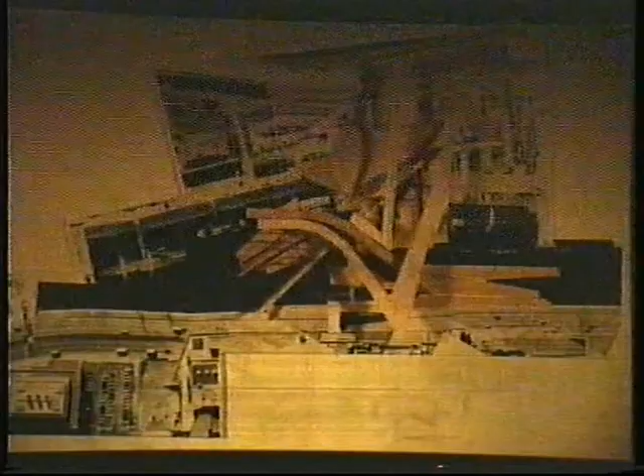Here was one proposal about a piece of parking garage with the land, fixing some of the boat museums, starting some connections with the old mall, changing that into a commercial street, and in a way I offer this as a kind of tool to dialogue with the city and the client. It's a dialogue we started two years ago, and we keep going with letters and things like that. So I hope sometime we'll get something.

But in the context of today, I like it much more just to stress this repeated act that you will see in most of the slides. This is the competition for the concert hall in Copenhagen, near the harbor.

Again you see the proposal was to fix the position of the boat, the connection with the bridge, the forced twisting of the building to face the old city, because I think here is Charlottenborg, etc. So I think this twisting allows us to start the dialogue between different scales - the existing row of houses, the offices system, the public halls, the same atelier.

In a way, as something you could start almost by repeating the same act, creating this kind of topographical quality. It was a building thought to be mainly in wood, which I was very fond of. But again, this is a dialogue with the city of Copenhagen that we keep following, and that was one of the competitions.

And then probably this is clearly almost programmatically built on the pavilion of Unazuki in Japan. The commission was for a meditation pavilion on a pilgrimage road.

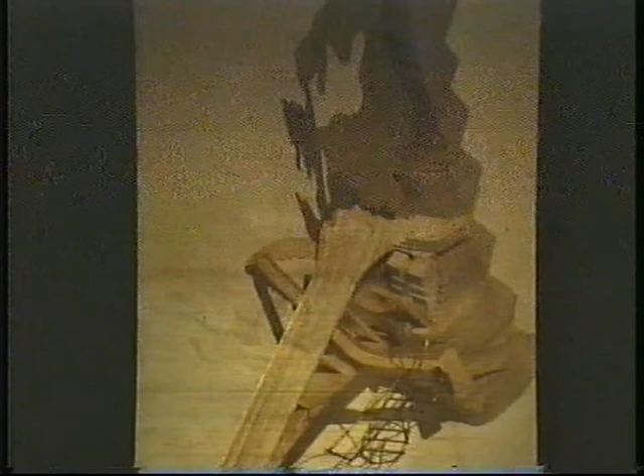It's a kind of structure which is developed, you will see later, out of the continuation of the path into the void and back into the path. Here is the pilgrim path, and this is the crossing bridge, which takes the old foundations of a suspended bridge as a kind of material to work with.

So in a way, also in this difficult condition, the only thing I did was to repeat the effort of that builder. So you see the path, and I think it's quite clear that it's better just to leave it and move, because I like it very much how just the same walking implies cleaning and things like that.

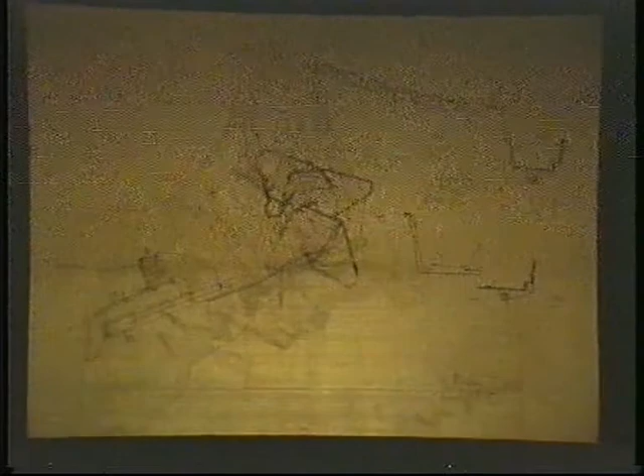And suddenly this is the end of the promenade, at the very end of the path. And in a way, this is how the labyrinth was created. It's very simple - it's just taking a path and twisting it around, trying to connect and trying to find an equilibrium into the existing structure.

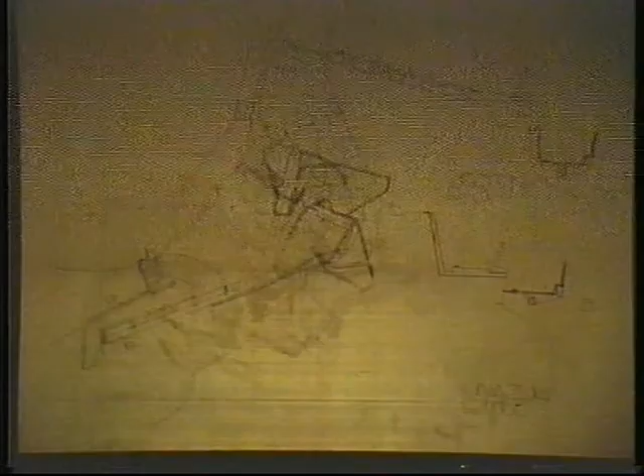And then, again in this case, the symmetry is almost very easy, because the upper structure is just working to counterbalance the bending moments of the other one. You will see it a bit later. But you should imagine that this is done almost out of repetition of the same.

Then even you see that the perception of the building is nothing else, again, the repetition of the same. Almost, I like to think there is a kind of invisibility in these things because of the photos and the way in which things are ascended to the media. The image is so important.

I think what's surprising is that at the end, with the buildings, by the repetition of the same technique, the structure repeats the same, the structures counterbalance the same, the handrail does the same. In a way, the building becomes invisible to the user. It's almost like a tool.

I was working with very low places to sit, first to work out the idea of the path and the twisting, but also to capture this sensibility about the floor that Japanese culture has. It was very physical and very easy - just bringing into the middle of the void one of these careful floor surfaces, which in Japan is almost equivalent to a very civilized way of being in a place.

You see how the mixing with vegetation is probably another thing completely present in the project, which is doing an action and then almost doing the contrary. So open something and then cover it - you'll see that in the cemetery. Open a door and then close it. It's always moving in between, doing one thing and its contrary at the same time.

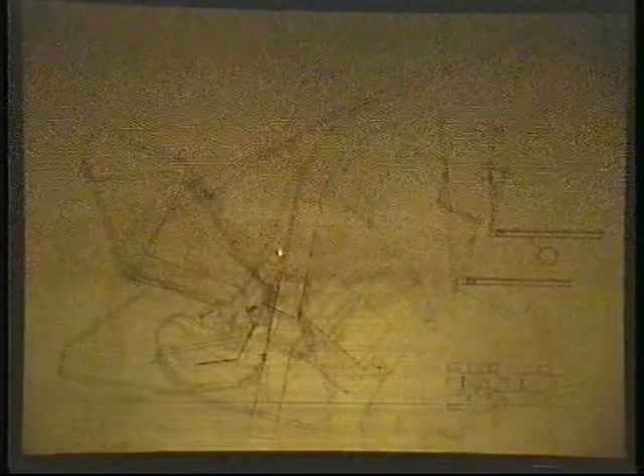So the pavilion makes its effort to get around the given structure - it works related to the old foundations, and at the same time is hidden by the existing trees, but at the same time it's exhibited by this kind of duplicate of the floor that raises above the head. You'll see it later.

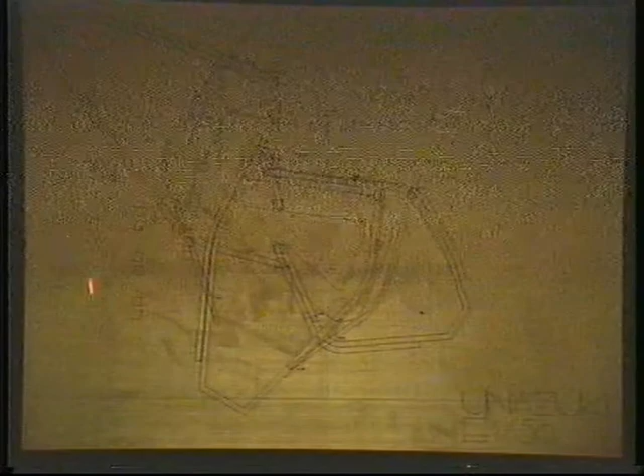This is probably the best drawing, or the one I like most. I brought a lot of drawings because I thought it could help show how we raise from the floor into a third dimension, this twist. I think the tools - the overlapping material and the very precise drawings - are really the tool, much more than a specific perception of the finished object.

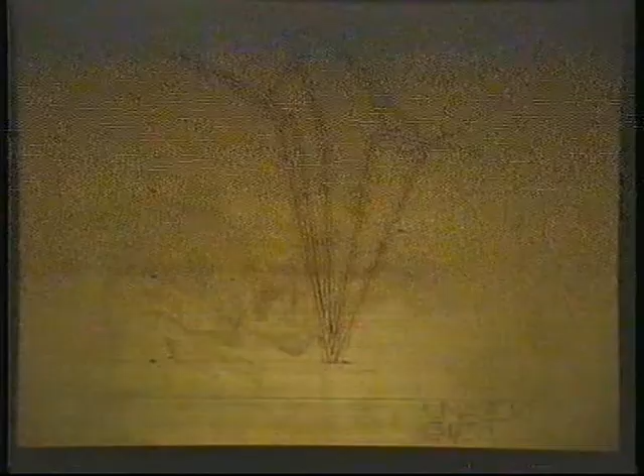Then you see the way of reorganizing all the foundations according to the old foundations of the suspended bridge, trying to find a kind of equilibrium between these things. At the end, the final structural scheme was very simple, almost like a kind of cantilever pillar.

But because of the place and perception, what you get at the end is this kind of place to see the path - I think much more than a meditation, it's a kind of physical sensation of just being exposed to the maximum long possible border.

Again, this strategy of maximum length and also being down - this is the view from the path in which that thing almost touches, and then you see the cantilever balcony there. That's the only hint you see of the construction when you enter the path.

I like this kind of pair here - this is the old construction, the new bridge that you don't see, and the new construction that in a way liberates it from the presence of the bridge, making this connection with the specificity of the nature here. I think that's quite important.

This becomes - this is this very single spot here. What it has really become is not so much a gate into the path. It doesn't matter how the project gets its technical solution - it becomes a kind of symmetrical object in relation to the city, gaining this classical location almost like one of these martyrium churches or pilgrimage churches, which becomes independent in the middle of nature. I think this relation is very important.

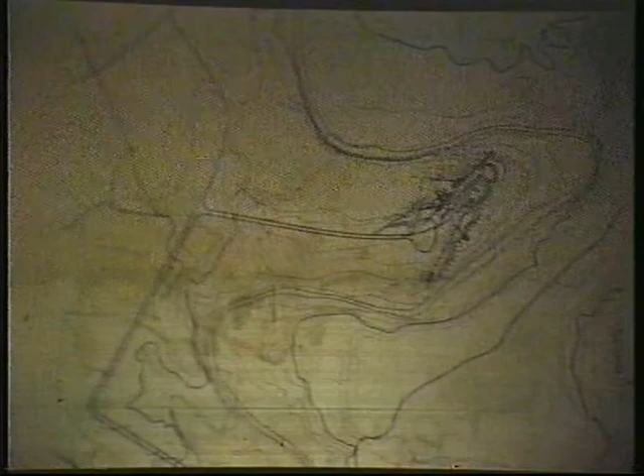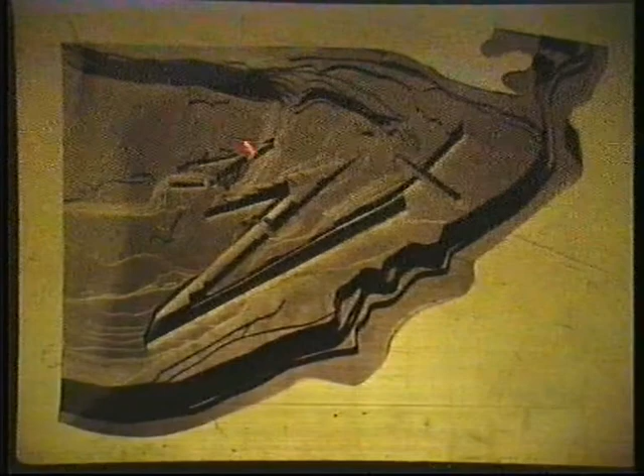Then I think, just by accepting that the cemetery is down there, accepting the nature of the site and the precise technique - this earth which was deep under the sea in antediluvian times is under pressure, so it's very soft, and digging it is quite easy, while at the same time it's an earth that allows time, in terms of layers, to be placed on top. So what was missing in the competition was the celebration of the same digging.

And probably here a specific technique was developed, which is reshaping the slope of the hill, the slope of the hollow, by using the reinforced earth system - trying to bring back the same construction act that criticized the previous project, and suddenly it makes its own reality, just by using the metal mesh.

This is not a gravitatory wall, it's working by friction. You will see later it gets all these volumetric qualities. But maybe this is the important thing to understand: this is just the metal inside of the earth, and the stones appear just by cleaning the surface.

So in a way, the same action, in this case, coincides with construction - that was the digging. But in the case of Takaoka, the action was much more individual, less collective, and was just about personally jumping into the void.

And then, this probably was the cemetery that was almost built out of itself - again, the reconstitution of the land after the excavation. This is the earth tombs, etc.

Then probably you understand why that - because in a way, like a certain soft quality out of the metaphor of the street, out of the thing starts becoming real.

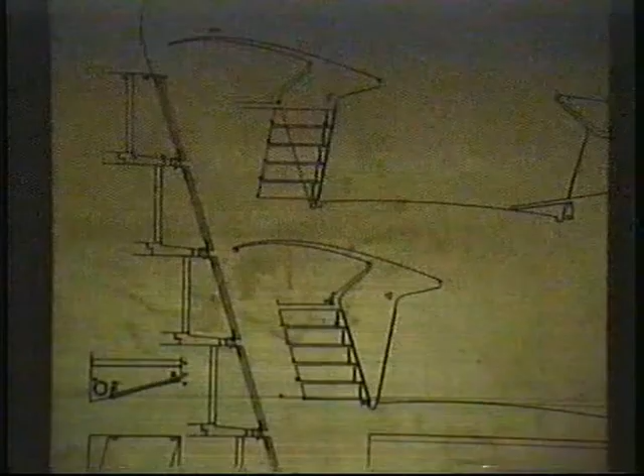But you see a bit here the plan, and that was, let's say, the technical tool that made the cemetery possible.

There were 3 different types: cast in situ, precast, and 3 precast pieces repeated, in a way piling and building one after the other. It's just the repetition of that unit over and over again, for the functioning.

This is the asphalt of the arrival. Here are some almond trees. The first time you go there, with the coffin, the car goes into the chapel, and then the family follows with flowers and representation. Then the family goes out this way and down into the cemetery from here, and the car keeps following.

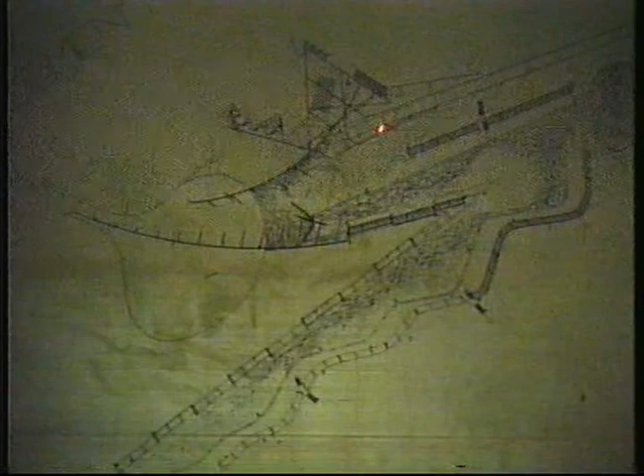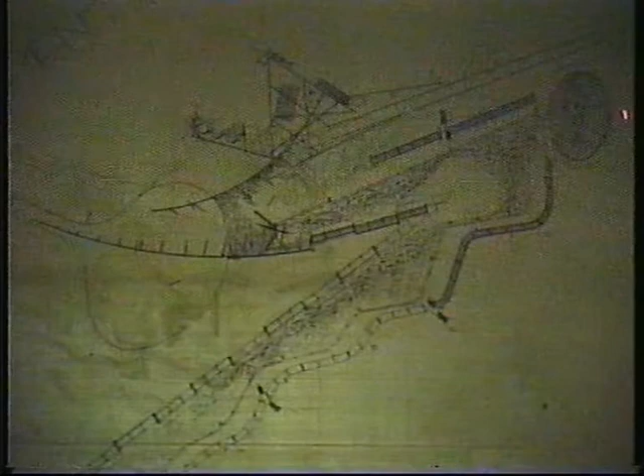After the ceremony, everybody goes up into the specific place. This is what was missing in the competition, almost an outside pair of the chapel. You see this idea of repetition and pairs is always present in my project.

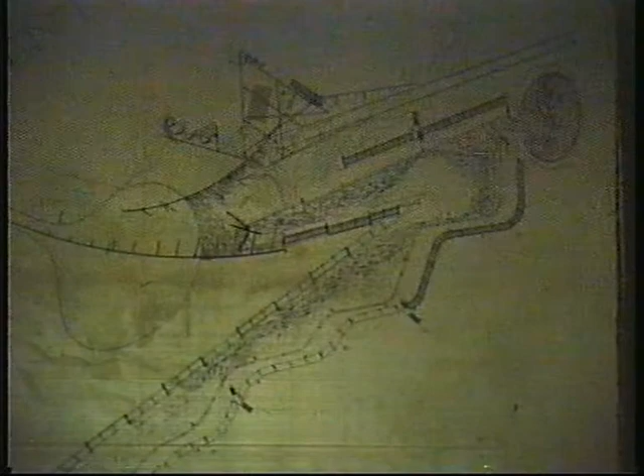As this morning they were asking me about my mistakes, if I don't make mistakes - I don't go to the psychoanalyst, but I think to avoid mistakes, if you put 2 things, you never know which one you like most, and you keep yourself in this kind of doubt between this and this.

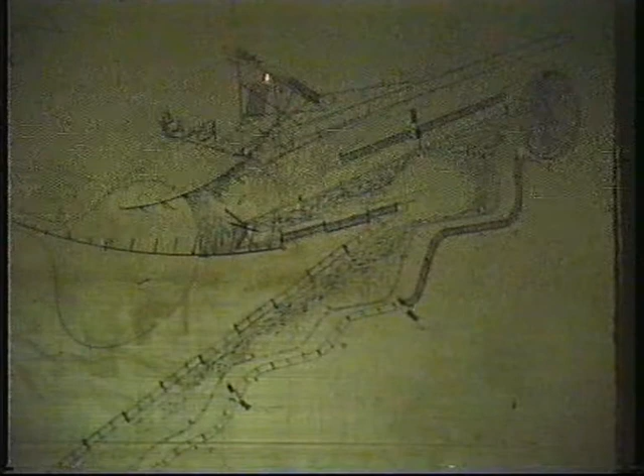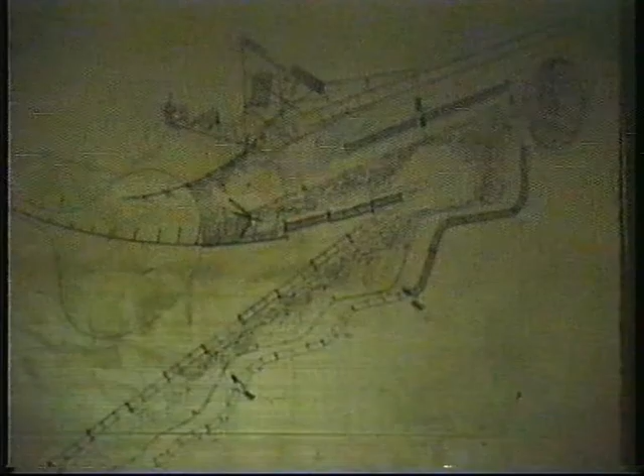For me, what even from technical or specific requirements of that room was not achieved, in a way I could achieve here. And the whole project is always full of this kind of internal connections, and that is the result, a bit, with the passing of time.

This is the upper level, and how the next step after the digging was the planting and filling of the cut with poplar trees with very subtle leaves. So the section of the earth is going to be, first, reconstituted, and second, by the same vegetation, which is going to be almost molded into the cantilever cast pieces.

Because at the same time, the form is very sharp and very clear, but at the same time it's getting this secret complexity at a smaller scale. This is the passing from one level to the other, going out of the chapel. I think probably this image is the one that represents the project better.

It's this twisting for something which is very long, almost taking this kind of path and surface quality, and suddenly it's being twisted into here, which is almost, I would say, probably the gate - the real gate, because from the physical point of view you also go through the dead bodies. It's a moment in which the same walls of the cemetery really become death itself in its physical presence.

And then you go through into the cut. But again, the effort is always the same: making that action and erasing it and making it disappear. The only form that is rising is the entry gate, which you will see later, and that could be a kind of summary image of the thing.

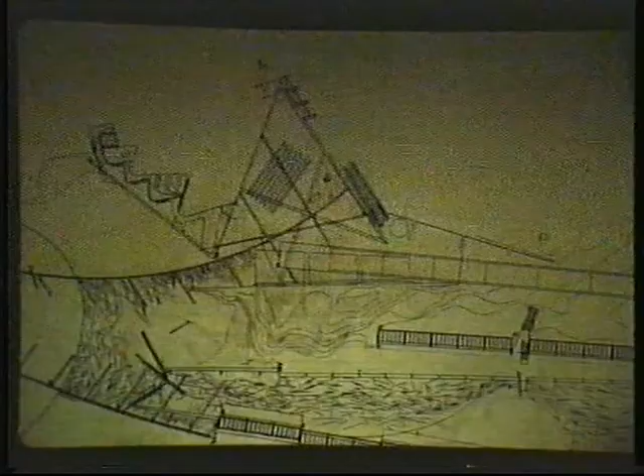This is a secret path parallel to this one, which is the common graveyard that in a way you are almost forbidden to go through, but you could. This is what, at the end, when the trees grow, will represent the cemetery. These are movable doors that when down close the possible entry of cars, and when up you could move through, and people should always find their way.

If the section is the project, the trees are the second step. There are objects like this one that make a kind of theatrical representation. This one, if you imagine it moving, closing and opening, is the one taking this space here, the entry of the path and the service building into the chapel.

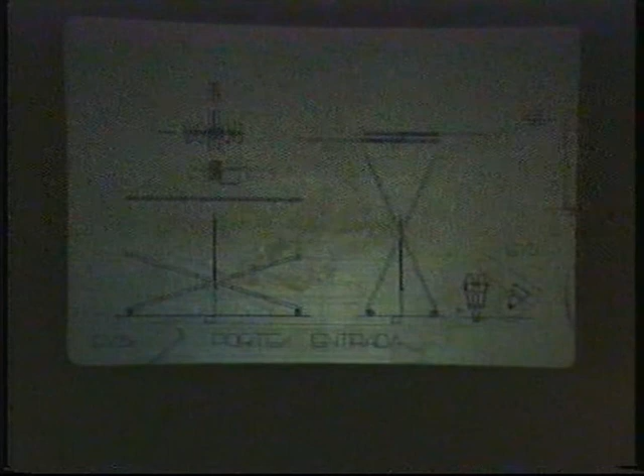You see from here to there, and probably this is for me one of the best labyrinths I did. The labyrinth has this quality of extending arms, touching, and then suddenly raising and repeating in a kind of free dimension, where you have all these laws of gravity and precise things. I like this kind of almost compass, and the section and this compass changed the project from being just a path into being a kind of place to stay. So it twisted.

I think the details aim at the same thing. When things meet each other, they never hide the complexity from where they are coming from, and in that sense I like it.

You see there is always the circulation path, similar to the project. Here the only thing that is covered is where the ceremony happens, but the only thing that was built during a very long time was this series of rooms, almost like each room is nothing more than the excavation of the land until it touches the possibility of a new room to grow.

Almost again this kind of geometry that is very precise and develops its own static qualities and dimensions. This is absolutely defined by the capacity of the cantilever of the concrete or whatever. I think the chapel was built exactly with this technology, and this poor scaffolding structure was there for more than 4 years.

So now I'm thinking to keep it, because I really like it, and if not all of it, because then the ceremony could not happen, we will keep a lot of them. I think the chapel or the room was built in order to allow a ceremony to happen, and I think this is one of the most beautiful ceremonies until this moment, so I like to leave a trace of that in the next step.

And that is the entry of the service building, which uses the same precast pieces as in the niches, and then lets the door almost always be half open. The door is bigger than the frame, so it never closes. Well, it closes, but it does not go in.

I think it's quite important, and this is probably the way of arriving at the detail, almost by quoting—everybody knows Asplund, no? Everybody who has gone to the cemetery remembers the key. I like it almost as a kind of personal quotation.

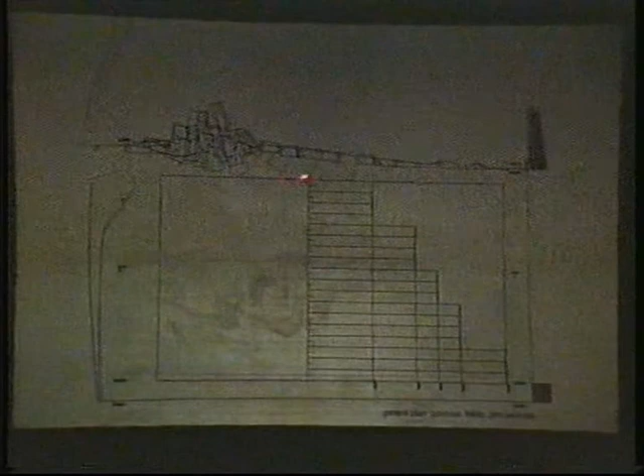Probably, almost automatically—this is archery, and this is one of the two buildings, the one that is most a porch. You see the same strategy, knowing that just by this horizontal effort—horizontal effort is very much related to the sensibility about walking, about distance, about effort. It's less about eye and view.

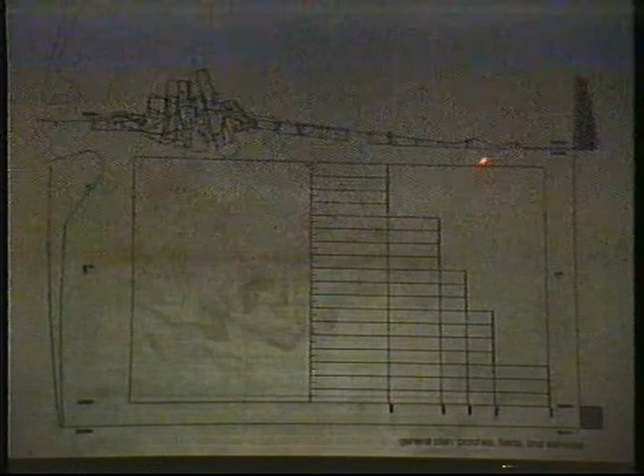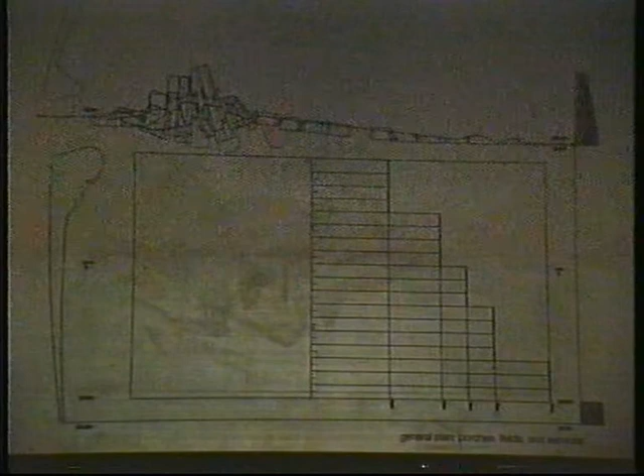But in a way, the porch that could be public could become private without losing its quality. The whole construction was pushed inside by the carefully hidden retaining wall, which we will discuss later, and from there similar canopies were sent outside. So in a way this porch becomes public here again.

But you could almost trace this project on top of the service building of the cemetery—it's this one. Later we will see this changing by the use of an earth-scale landscape into something much more public. Here was competition and here was training, and that was the public entry, and this was a kind of secret building. So in a way both act as a pair—what I wasn't doing here, I did it there. I think all these internal logics are, in the making, very, very important.

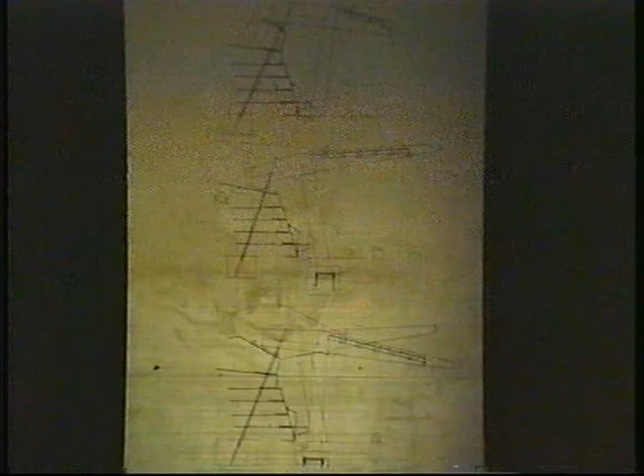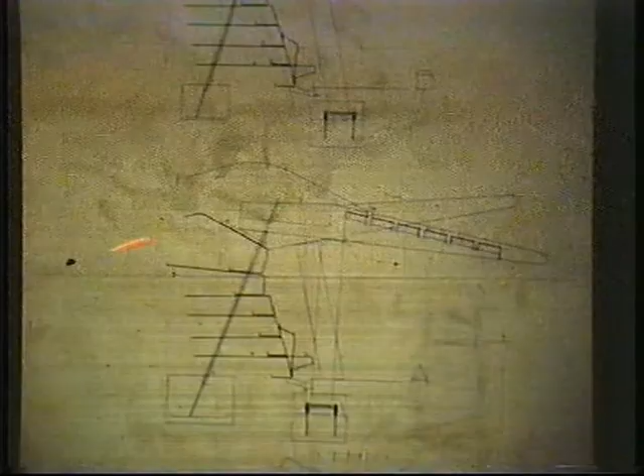And again, I think probably this is the best example in which the statement was done straightforward from the beginning—reusing and retaining earth, but not by itself. One step more was adding the weight necessary to cantilever a bit through these compression pillars, the cantilever of the porches. So that was being used for weight, but at the same time the earth was used by friction, let's say. That was almost the exhibition of the possibilities, and public space probably allows this kind of non-precise and a bit undetermined way of defining things.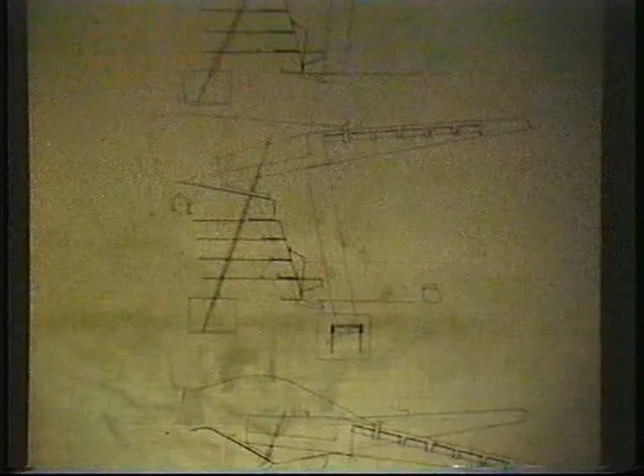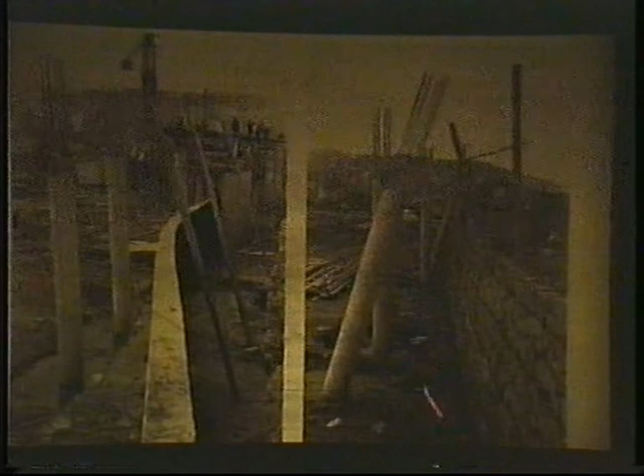I think this explains quite well the project. The same thing when it becomes hard, concrete, precise, and becomes a measurement, but at the same time in both, the energy or the decision to create the landscape worked the same. Here you see the thing working in a much more precise way, and here in a much more loose way. And that is the result.

Which is this very, very long public promenade. That was a clear statement, thinking that in the future my construction should compromise this place as a public space. Also some games about not wanting that—for me this is an important statement. I never explain these things, but today I thought in a private conversation it could be nice to do it.

For instance, one of the presents the dimension gives you is the enjoyment of perspective. And then I thought that in a way the thing I don't want is this kind of repetition of the dimension. So as soon as you get into the entry, the thing gets chopped, and almost becomes like a dwarf, very small. So in a way, it's a completely different nature of that bit and that one.

So each one becomes very precise, and I will say not precisely connected into a kind of desired overall effect. I think you probably couldn't realize it in the model, but in a way, if there's going to be a change in between this and this, it's probably better that the substance of these things are different and express its variations.

And that probably was the clear statement about how the place in the future, no matter what happens, will have this compromise about this kind of mixture between a specific scale and landscape as opposed to a public object building.

And here you see that in a way each action could be independent, and working for public space and public clients, I'm always very conscious that the building could be stopped at any moment and could stay like that for 10 years, or 20, or forever.

And I think what you should understand under these plans is this desire that the foundations or the remainings will be maybe enough. Let's say you imagine that the retaining wall could be built, and I think in a way the project will not lose much. I mean, I don't care.

Or if they put just these roofs, for me it's okay. Or if that becomes an outside fence, it's okay, etc., etc. So I think I should not tell that to the clients, but I think this sense is very important.

So then what it means is that precisely the solution should be very precise, because what you are finding is this kind of moment in which the overlapping of the complete complexity of the thing should not ruin its quality as a fragment, which I think is quite important for me.

And now maybe I'm working a different line, but at this moment I was thinking of this quality of non-completeness as the best way to enter into the reality of our suburbs and our cities, at least in the very specific conditions I've been working in.

So finally you see that the cantilever of the porch here is being almost forced to do the same game as the cantilever of the retaining walls, cantilevering the same way. So here inside is a porch of the same quality as that, and again the twist is being made, and that twist makes these pillars become almost like dancing figures that take the same position as the people using the building.

This is the gym, this is the entry corridor, this is a meeting room for small speeches, this is the bar—but at the same time the pillars should take the compromise to get the same position precisely as someone who will be in the room, if the room is built.

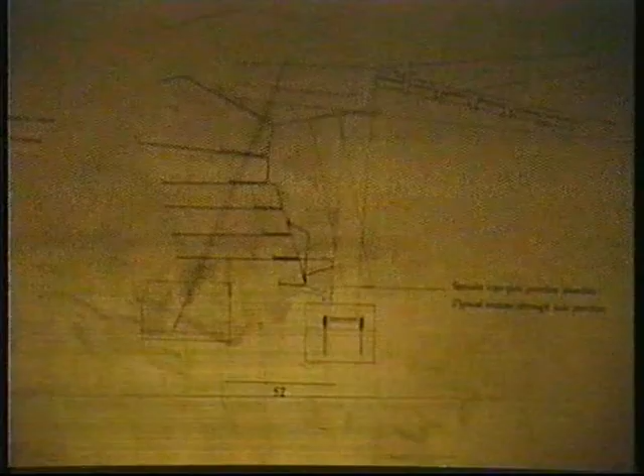So it was the changing from that heavy construction into, let's say, something that was able to be modified in a way into these very light elements, which in a way are holding specific parts of the building. You see better here. That is precisely the entry, where we put this kind of very old tree with some of those pillars, just taking the dimensions and positions of people.

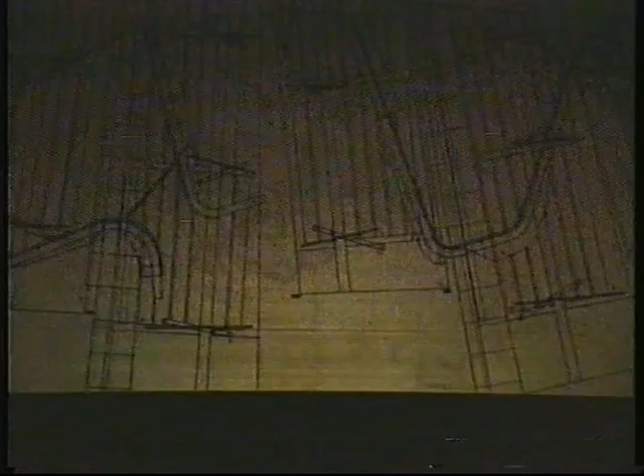It's almost the repetition of the way in which the building is made, by the way the building is being used through action, let's say. And then this, from landscape, is hidden and in a way again negated. That is probably the distance in which I work, where I have established all those conditions, and the effort is just making them fit precisely.

Their dimensions are probably the most important clue, related very pragmatically to technology. For me, dimension and material probably will be, again, the dimension plus the sense of reality will establish the dimension that I wanted, and the sense of reality will establish this kind of precise technological decision.

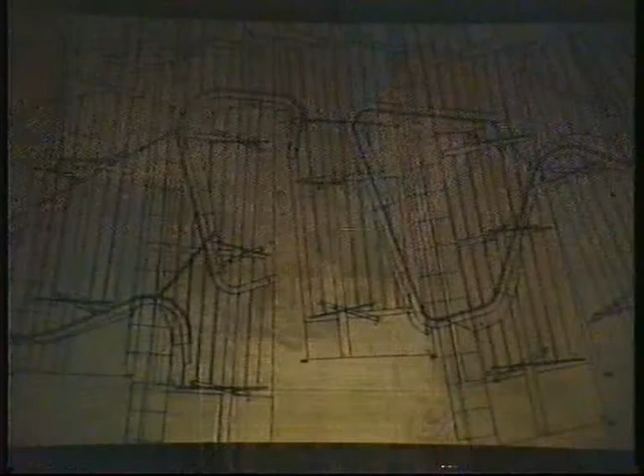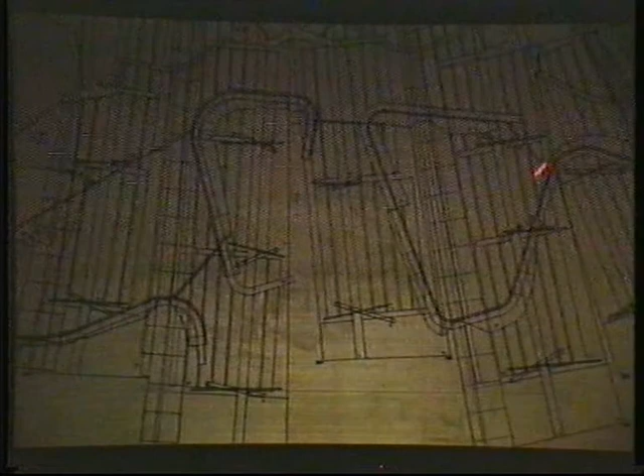But probably, again, this is one of the labyrinths I like to show today. Because in here, what happens is that not even the relation between the roof and the plan is established, because we should find how this piece gets connected. And that piece is probably the most difficult, and probably the only thing I was not able to think through from the cemetery.

Let's say, until now we're a bit more precise, but we've been following the cemetery project. But then suddenly these conditions are put in a way that the material you are using doesn't give you the solution, but on the contrary, it puts a problem.

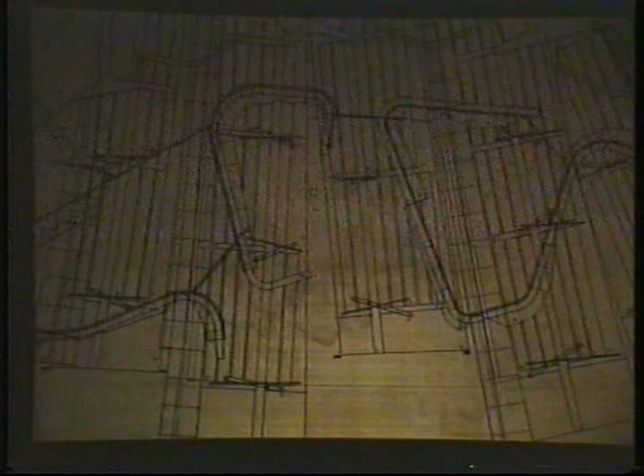And I think, even if you consider that the roof, as Kenneth was making a distinction, and the earth was making a distinction, the walls are related to the earth, etc. I'm not able to make that until I found it, that I think is very important.

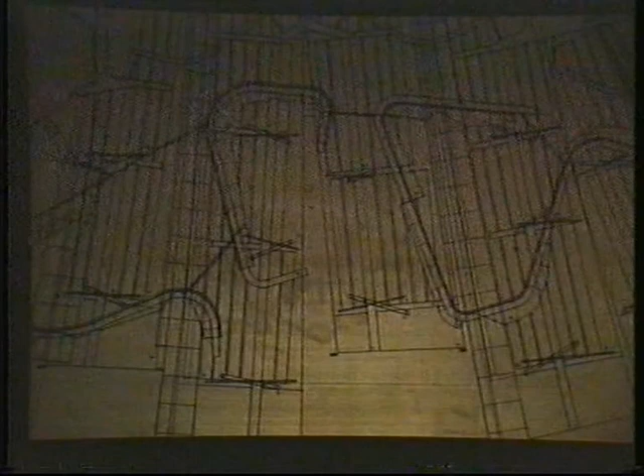This kind of overlapping between roof and both roofs is the thing that brings light into the building, in the same way that light enters into a porch, and at the same time is where the water is collected and thrown out. Light plus the water, plus the careful, almost blind following of this thing, like connecting, just taking points and building that, is what really builds what is, I think, the real construction.

Let's say at the end, the thing that becomes very logical in the way of using it, I think, becomes one of these probably very precise spatial labyrinths we could say that I've been doing. Really a construction that makes its effort of connecting at all its points.

And it's the structure which at the same time is letting light inside of the, you see, this is the inside, letting light inside of the building with this kind of outside bright qualities. I mean, you are under a porch.

But at the end, this kind of thing falls and becomes secret, and probably here is the origin of some of the things for the Unazuki Pavilion. It becomes secret and hidden.

And I think at the end it's even able to express itself in this kind of gorge, or how the water, I mean, all this kind of, you could say, is probably the project in which that bit was much more necessary, becomes almost like a hidden blind window which is expressed in its form only.

And then coming from that as a hidden building, this is its opposite, so it's above the earth. What happens inside here happens on the surface, etc. It's mostly a retaining wall system with precast, until it becomes a ramp and an outside hall here for getting together the visitors.

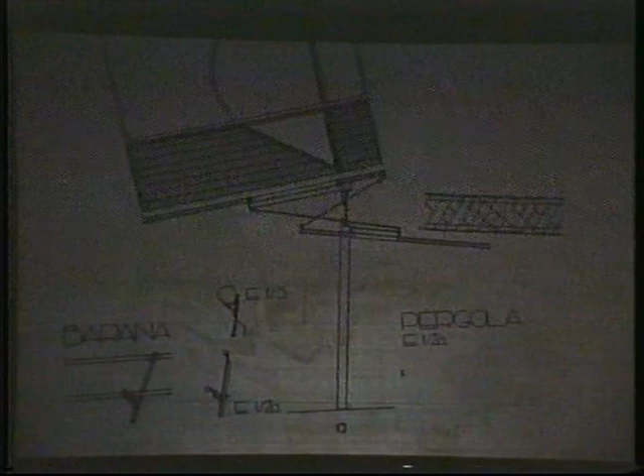It's the moment in which both meet, where the ramp gets into the floor. And it's that tool, almost again in these projects, that is probably the equivalent to this kind of metal gorge window I've been showing you in the previous project.

This was something that deals, instead of the complexity of the form, with the complexity of the light, and how in a way it was almost a machine to draw light. I mean, that is quite easy.

Instead of putting letterings—yesterday I think it was very impressive to see the layerings of a very precise, powerful project—but I think this is something, just letting the material do something similar. Just the sun moving at this point makes it a very precise gate.

And then you see putting together the things very, very near: that roof, the earth, the new path. It becomes one of these, becomes the answer to this kind of place.

The answer is being given by, it's difficult to see here, but by all this kind of twisting of the earth, which we will see later, I think, and that, well, let's see, it doesn't matter.

Okay, here it's better, no? You see that, could you focus? Okay, perfect, because it's important not to be confused.

So I think you see here the earth, the asphalt, the concrete, the earth, the same hollows, how it finds its coherence. So in a way I was trying to make all of that a kind of unit, that was able to be described on the surface.

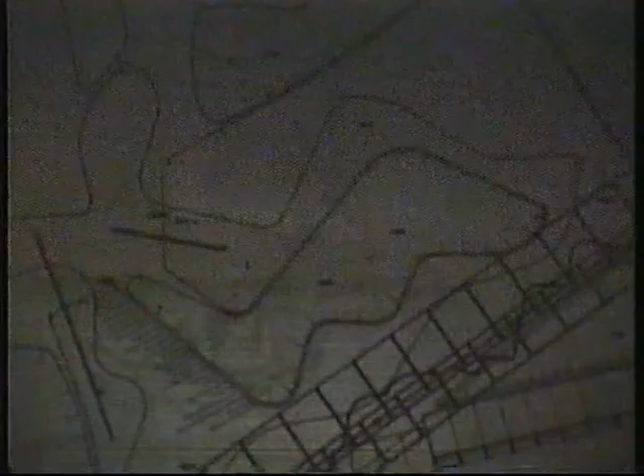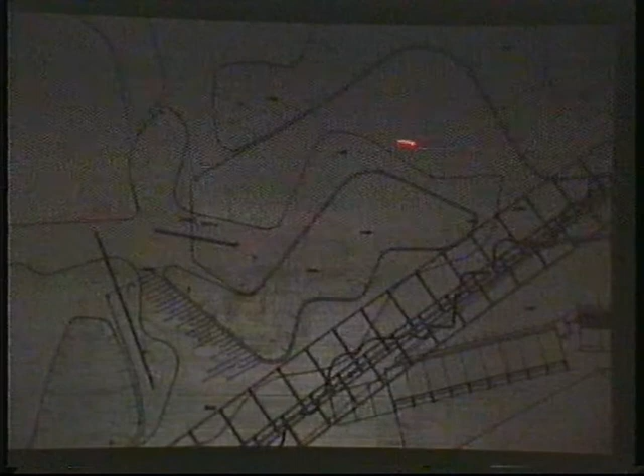Again I wanted to do a pair between the structural plan you have seen before and this one, because here the structural situation is much simpler since you're just working with earth and textures, but the effort was exactly the same: trying to redefine precisely the conditions for a moment to stop.

I think the moment to stop is usually when you also raise your head and have all this body connection with the complete building.

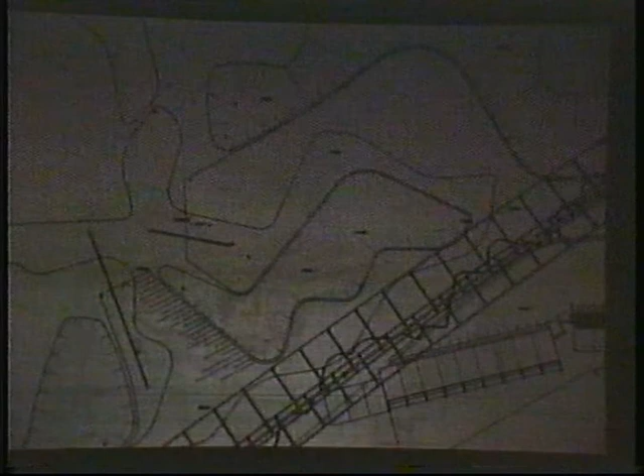And I think you almost see the overwhelming repetition of the same in between the street, the cars, the light, whatever. It's an effort to change, at a precise moment, the complexity of the city into almost this kind of unexpected gate.

I think that's probably the slide that explains this better. Before you, coming from the city on your shoulders, you just move into that terrain again. The slopes help to connect, and at the same time it has to do with body effort, and then you move down very fast from here, or very slow from there.

But then suddenly, that is the first shot I showed you with the light entering the canopy. And I think this surface and that twisting is probably, I think, very consciously developed in this project.

Which is a school plus small housing for children in a very difficult situation, in a historical landscape in Morella, which is a very beautiful town. And the mountain was given a kind of almost northwest slope, which was very bad.

And I think, again, this was an effort to get out of the topography in a way. Maybe everybody will be interested in how this building is being integrated, but it's not true.

The main effort of this building is being out of the repetition of the topography, trying to find another kind of relation. You see how the building, almost by twisting, gets this kind of exterior courtyard, the place for the housing, the ramp of connection, the entry, auditorium, and the places for library, kitchen, etc. So in a classical way, services protect the classrooms that face the courtyard. But I think the main interest of the effort was to put the building in contact with a larger topography, which is never the thing you find at your foot.

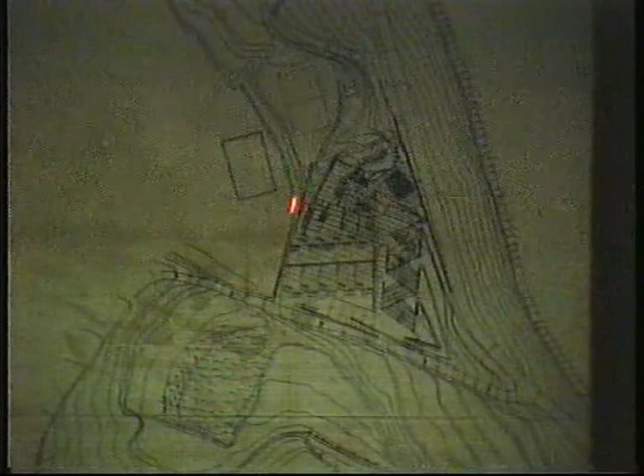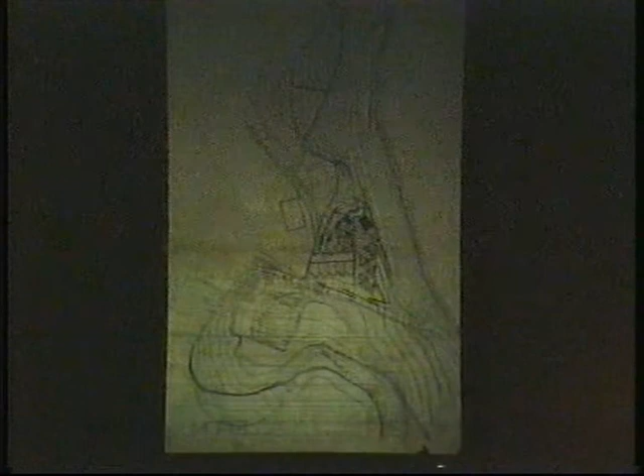I will say that very elemental, because that helps to guide your decisions, and define, for instance, the housing much nearer to the town. I think all this project is nothing else than the reelaboration of the housing pattern, done very directly and, I think, quite successfully, because it's a zigzag system which has no corridors, and has all these kinds of small courtyards, almost in this kind of classical British school housing tradition. And then this is nothing else than the effort of bringing that project into the landscape.

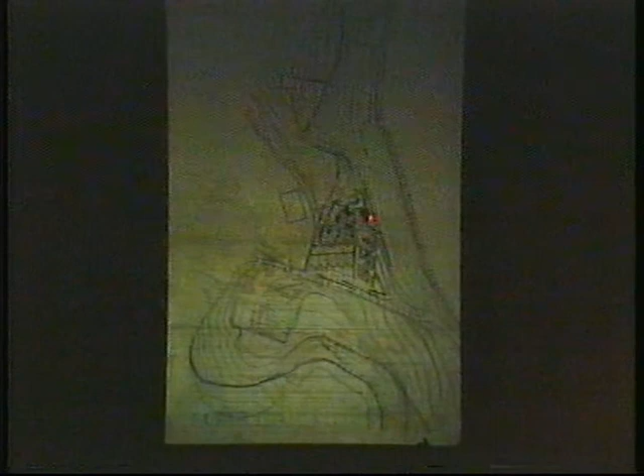Again, probably you see it better here. Almost the whole building is dimensioned by the dimensions of these rooms. And again, all these kinds of things later become very abstract. At the beginning, they were very soft and almost a mimetic repetition of what was there. But then the building jumps, and I think the same construction offers a much more complex and better explanation.

You see here, at the end, the result has no mimetic relation with the landscape, maybe just the care with the scale, and it gets, by satisfying specific needs, this kind of breaking quality. But this has been a surprise. It was never precisely a target of the project.

But because the main effort was that this unit, a complex housing unit, should be able to do the same twist. Again, it's being thought of as a promenade, a kind of path, whatever. But here the labyrinthic twist makes it connect with the built structure of the village at the foot of the castle.

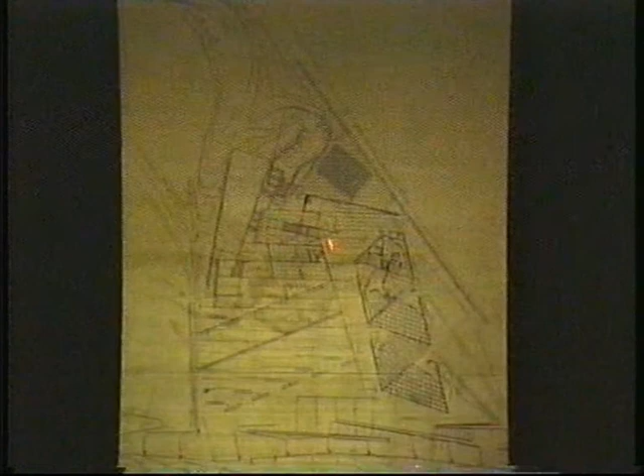I'm showing the plans because I think this material in my work is very important. It's what, in a way, supports the necessity finally of the abstract expression and construction. This is the playground for the children, and you see this quite careful effort to work almost like a tapestry system, in which things get connected and move in a way. Later it's almost exhibited as this kind of abstract cross.

Which is the terrace, the other terrace, the ramp, etc. But at the same time, I think it's trying to have this kind of quality in itself, which is able to divide the window in two and catch soft light and direct light, all these kinds of classical games.

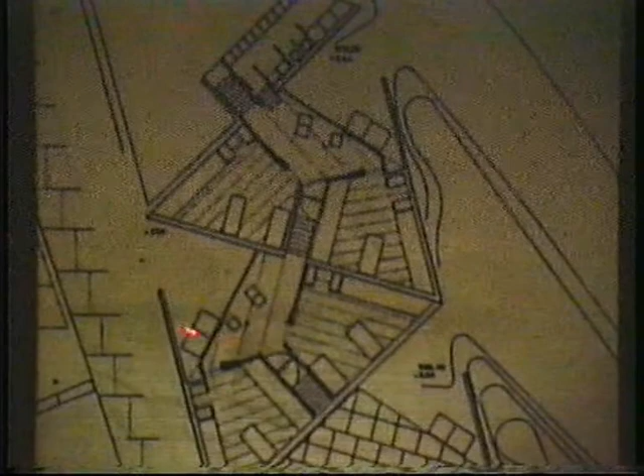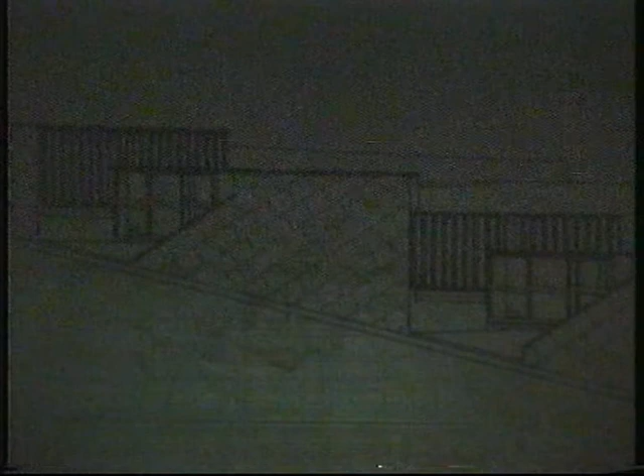But I think the real labyrinth, or the plan I'd like to show you today, will be this one. It's just these very simple units that you cross very directly, having room for 4 children, a small courtyard, and a small outside working place, with the services hidden. And in a way this rhythm, which represents almost one of these paths getting a stop, is the thing that gives the scale and protects the building into this overwhelming landscape. You see, in a way, the result of that labyrinth was this window, which allows the building to change the scale.

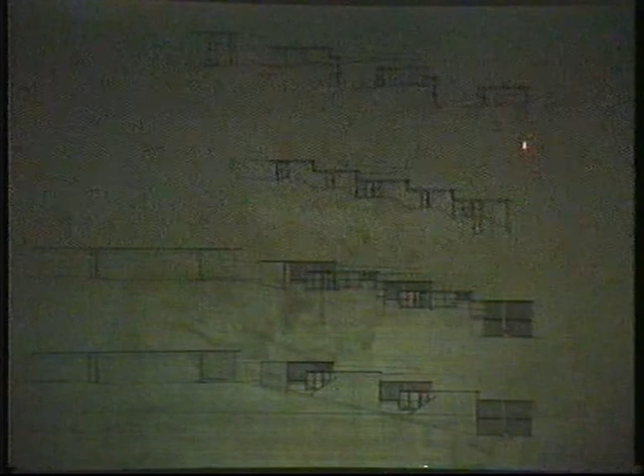This is a series of sections which I like to show, because in a way that is the window and the continuity of the ramp. It's exactly the same building being cut, starting from this kind of double height scale into the continuity of the steps, into the internal connection between working places and living, and an outside window, then it starts getting the earth inside of the building, dividing services and classrooms.

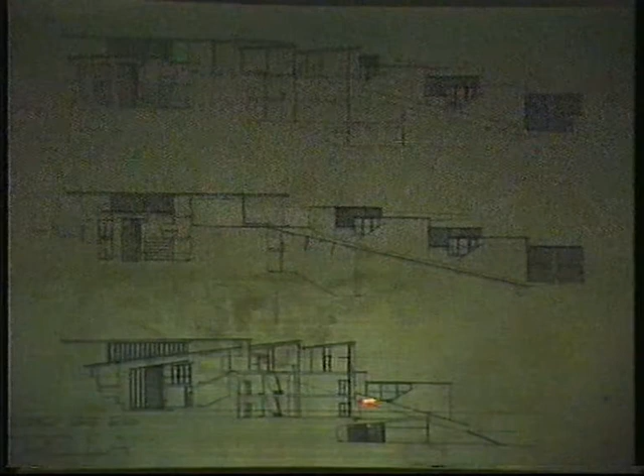Then the thing gets more connected here and becomes the starting of the public connection between outside and inside with the library. And again, that is very clear, until the building just gets framed and protected again.

It's almost letting you see this kind of labyrinthic quality. The sections were taken one from here, one from inside there, another from the courtyard, another from the ramp, another from here. So at every moment, the building's twisting quality constructs really the complexity of the space.

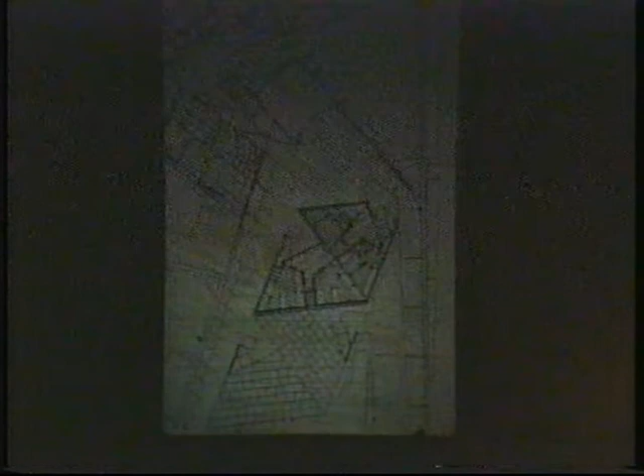And I think the result of that is that - it's almost something that, again, I was more conscious of the ingredients than the final result. The ingredients were about letting light be into the building, almost a kind of sun testimony.

It makes the building with this, and I will say, my hope is that still the physical quality of the place is more important.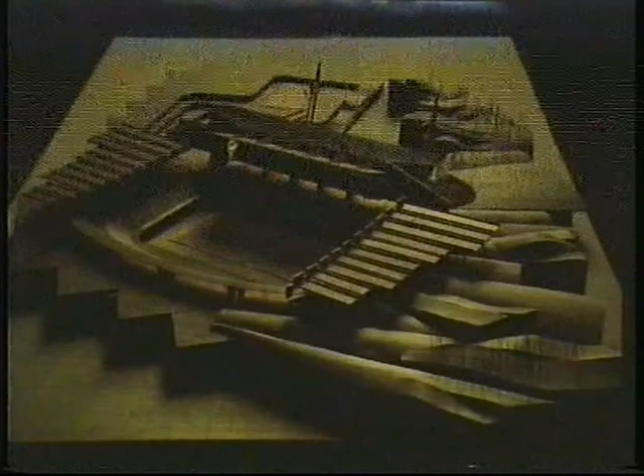And that, very fast, is going back from surfaces. I think this was the competition model for the Huesca project, and that was the main scope of the project. Again, peripheral situation, under a mountain, no infrastructure, etc.

The main idea of the project was just to make an equivalent of the interior ring outside as a public space, and then in a way use the digging of that to give the scale of the project, giving the scale of the project into this kind of very low porch system, and modifying the land out of the digging to be able to create the outdoor space.

So it's almost a mathematical equation, in which the effort of the construction should be made transparent and should happen something in the public space.

And the problem put here again was one of the same - how you enter or how you move, or what is the result of this almost absence of space. I like the things to be as low as possible. It's one of the maybe games I like to do with myself.

And this is the final solution. This is the very sharp and dark porch that in a way protects and throws the water and makes almost this kind of theatrical representation.

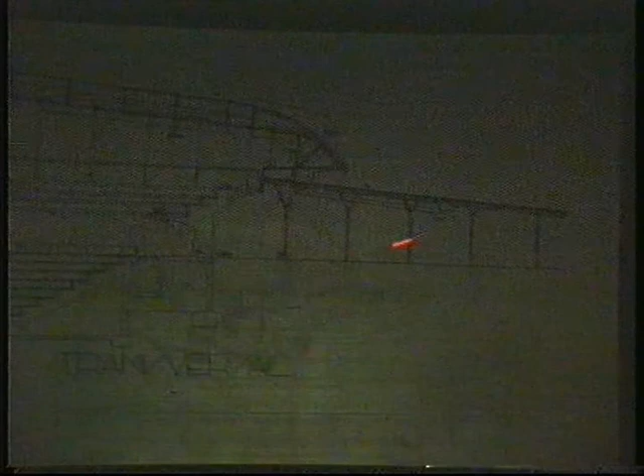Again, it's a similar situation to Morella. This is how the porch gets almost as low as possible, and how the porch gets duplicated in the interior by the last seats as a kind of ring porch, and from there, 7 meters below starts the playground.

But I think, in a way, this is a very important piece, who makes, again, this kind of sensible fingers outside of the building, which these kind of things are always very much represented by the shadows, in a way that the sun makes one of these scannings that in a way projects the construction into the limits.

And because the project is interested in that, in a way the scanning made by the movement of the sun will offer almost an X-ray of that. This is a bit the solution of the porch following the main directions of the beams, supported on independent pillars.

And then is the moment of entering from that into the concrete porch, who in a way makes the ring and makes, let's say, the arena.

Which again is a quite conventional building just around some sport hall. The only place which is carefully, specifically different is this one, because this is the construction which in a way should connect the interior private and the exterior public. And we will go on that.

This kind of ring, which is the entry level, is able to make public outside. Here you see the main structural elements. The building was done just by this moment, when the excavation was done on the foot of the hill, and then it was clearly understandable that the lower the building was, the better it was.

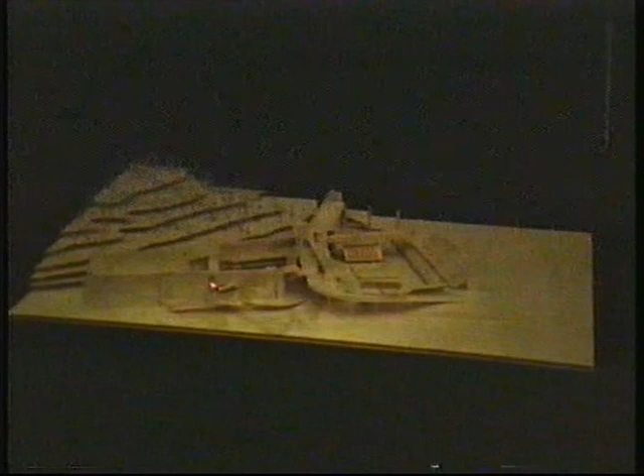The moment people enter the building, they enter almost out of a window, let's say, they run parallel to the training, and then get one of these labyrinthic qualities here, and get divided into different movements.

But you will see that the moment the building touches the earth, an effort is being made to make that topographical contour the deepest possible.

Again, it's one of these under this kind of important and big construction. You see that the construction of the beams doesn't only celebrate the dimension of the big room, but tries to follow the complete dimension of the building, following this direction of the public space,

which in a way is that part here. We will see later. This is just for you a bit to understand. We are going to describe more, but you should situate yourself on the very ordered plan with the beam you have seen, with the double arch.

And then again, competition, training, school, and training. Very simple. That is the back part of the building, which is shown quite conventional as a kind of sport facility building.

You see that both parts don't become symmetrical. And then as soon as possible, the building loses its height for the training where there's no need for a high ceiling for apparatus. The thing again almost becomes condensed and packed, as small as possible.

Because in a way what I really wanted is to stress the big dimension of the building. This is the thing we have seen, and also to show you very elementally the decision about that. Here dimension is the most important thing, and the fact that it has a kind of end quality of the topography of the hill, and at the same time a kind of balcony situation.

So the plan I like to show today is this. It's much more like if the building doesn't exist, it's a kind of hidden void, a bit of air which is being taken out, and then suddenly you are just kept with a kind of topographical, you could say, unknown perimeter.

Which in a way is making this enormous effort of economy, pushing and pressing the interior space, and letting the representation of the access of the building act almost like a theatrical quality on the street. The street, which is a given perimeter with no specific qualities.